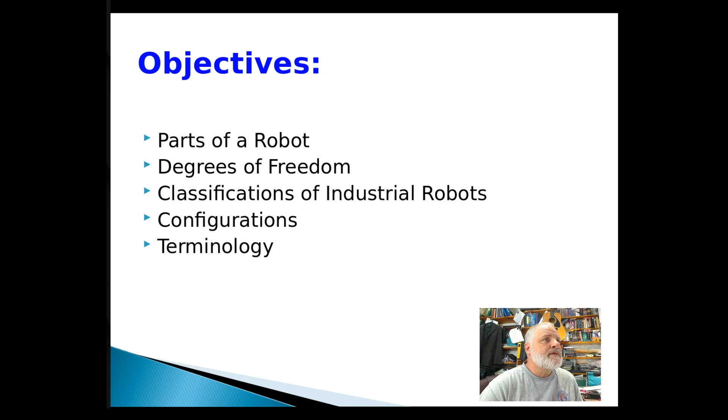So the robot system, as defined by the Robotic Industries Association, or the RIA, which we discussed last week, but the RIA breaks the robotic system down into two parts, which number one is the robot itself with three major components of the manipulator, the controller, and the power source.

And the second part they just kind of classify as the work cell, which could be like the microcomputer, PLC devices, HMIs, signal interfaces, all the other peripheral equipment that is needed to make a functioning work cell. FANUC, on the other hand, they add the software as a major component.

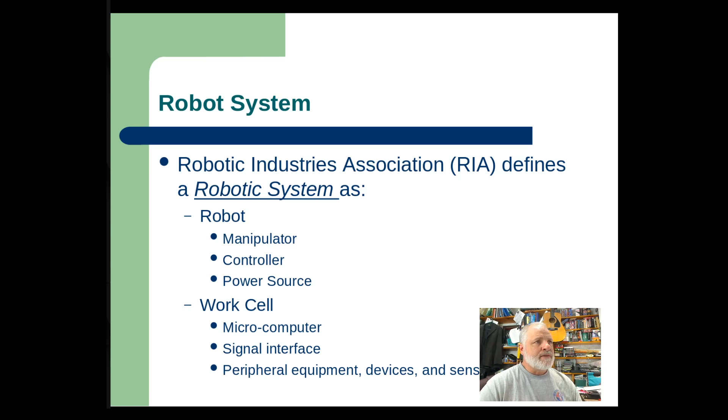Okay, so if we look back, we see that the RIA basically defines the manipulator or the robotic arm, and then the controller, and the software actually runs or is found within the controller, and then the power source. So FANUC, they don't really separate the power source, but they have the mechanical unit or the manipulator arm, and then the software, and then the controller, and then all the other peripheral equipment.

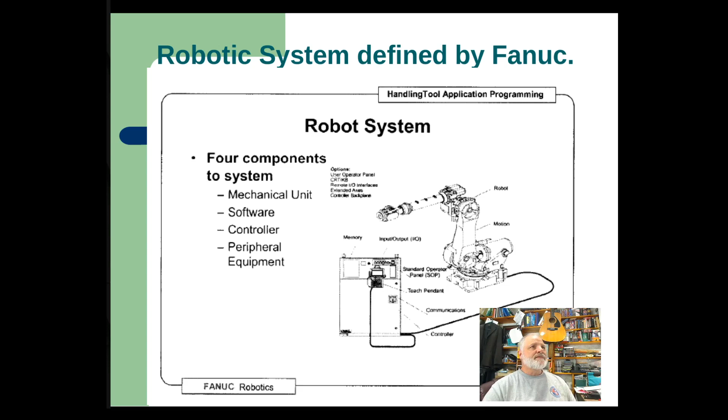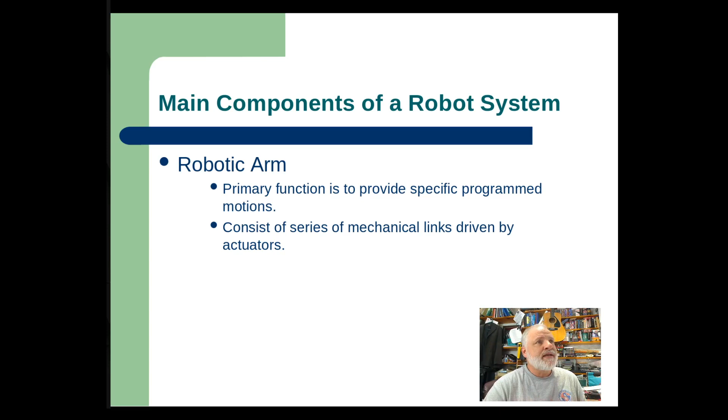Alright, so looking at the robotic arm, this is the part that when people think of robots, this is what we think of, the part that's actually moving. The robotic arm's primary function is to perform specific programmed motions, and it actually consists of many mechanical links driven by actuators. And actuators, we'll look at that in a little bit, is basically saying we're going to take electrical or pressure energy and convert that into motion.

Alright, so the minor components then of the robotic arm are the actuators, which we'll look at in a little bit, and the production tooling. So the production tooling is the part that we're going to add on at the tip of the arm to perform some task.

Now the tip of the arm that we're going to attach the production tooling to, which could be a gripper or a welding tip, something like that, it's mounted to the moving tip of the robot, which is a flat surface they refer to as the faceplate, sometimes the tool plate, but usually they refer to it as the faceplate.

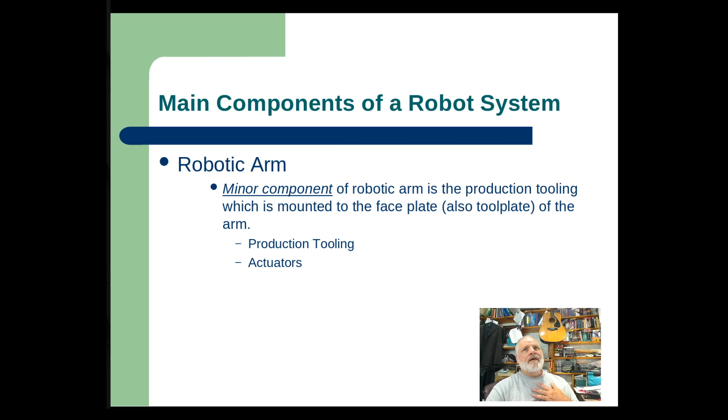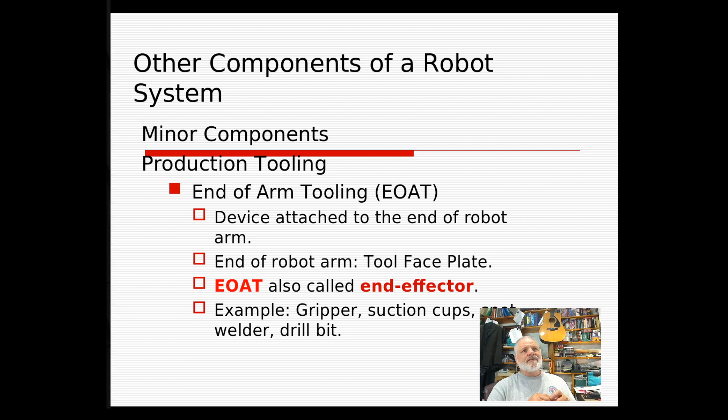Alright, and so at the faceplate there, we're going to mount the end of arm tooling. Okay, so EOT is an acronym for end of arm tooling. Again, this is like the gripper or spot welder or drill bit or whatever it is that we're going to attach to the robot. It's also known as the end effector or production tooling.

Alright, so here's just a picture kind of showing all the different minor components of the robotic arm. So we have the end of arm tooling, we have linkage, we have servo motors, which are going to make the linkage move, and then we have the optical encoders, which are typically mounted onto the servo motor, which tell us what is the position of that servo motor, and therefore what is the position of the faceplate or the end of arm tooling.

Okay, the slides are running slow here for some reason.

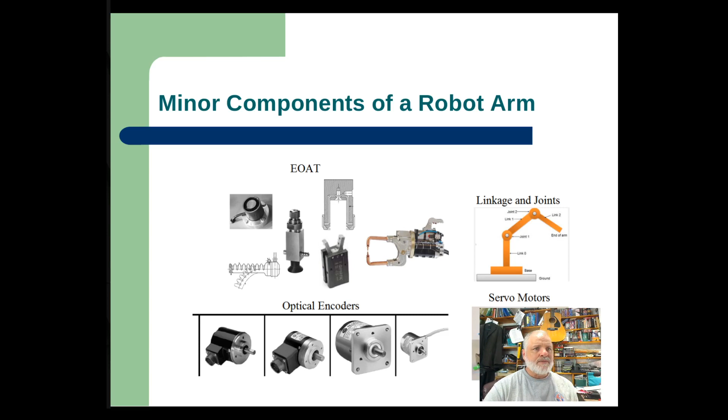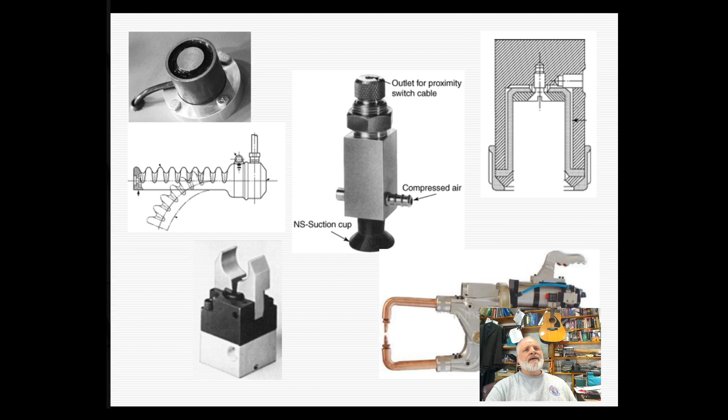All right, so here's just a blown up picture of some of the end of arm tooling. We have in the top left corner a magnetic gripper, and then below that is like a flexible finger gripper. In the middle is a vacuum gripper, and down in the bottom right is a welding tip.

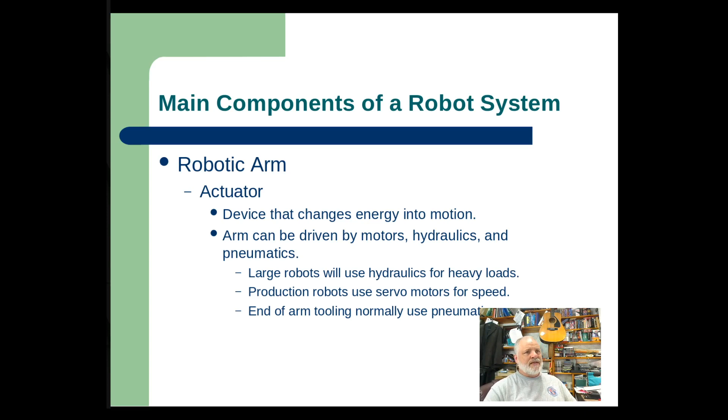Okay. So again, the robotic arm is moved by actuators. An actuator is just a term referring to some type of device that's going to change energy into motion. So usually electrical motors, could be hydraulic pressure in there. Now the robotic arm, depending on exactly what kind of robotic arm it is, a lot of modern robots have 6 different axes.

So these axes are the part that's going to move, and we break those up into different parts. The first 3 axes are group 1, which is the position group, which is moving the end of arm tooling into the area where we need it. And then the second is the orientation. So once we kind of get the tooling where we want it, we also have to kind of rotate it or point it up or down. And so that is done by the last 3 axes, 4, 5, and 6.

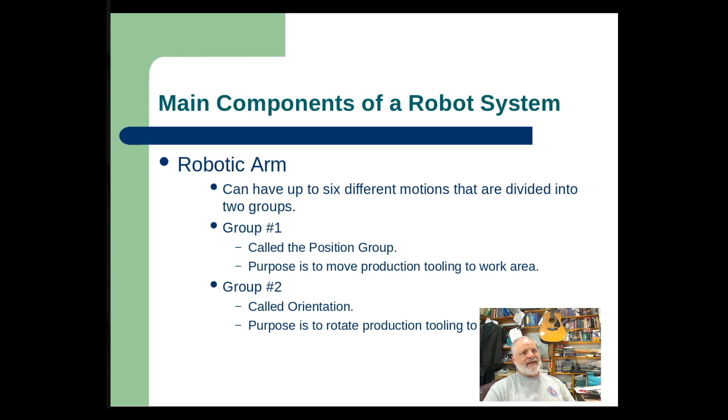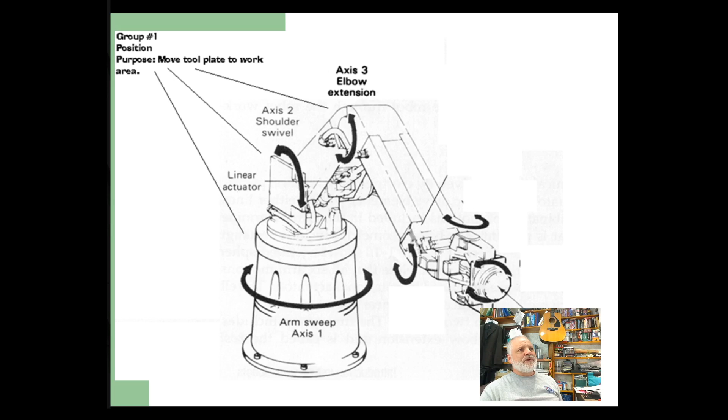And so group 1 includes axis 1, 2, and 3, which if you think about it as a human, axis 1 is kind of a waist movement, twisting. Axis 2 is kind of like your shoulder. Axis 3 is kind of like your elbow. And then axes 4, 5, and 6 deal with kind of your wrist movement. And they give you the yaw, pitch, and the roll. So they allow you to point it up and down, angle it sort of left and right as a yaw, and also to rotate it.

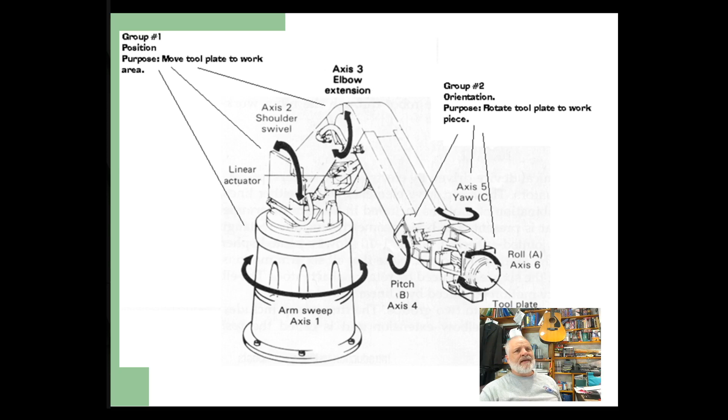All right. The controller is what's sometimes thought of as the brains of the robot. That's actually where the CPU is. And so in some ways the controller is just kind of like a PC or a laptop or even a cell phone. It's got a CPU, it's got memory, and it can communicate with other robots or other equipment.

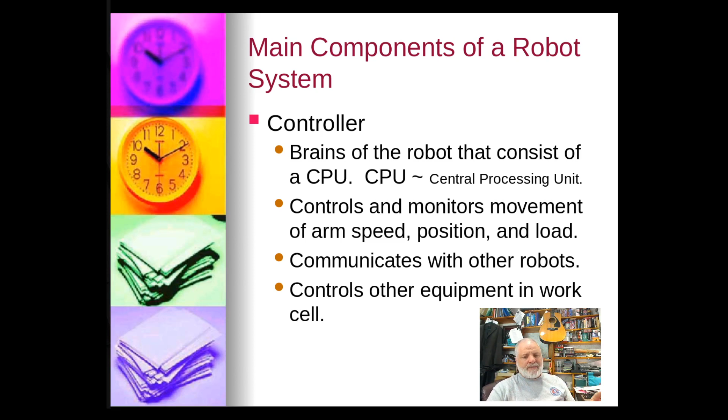All right. The controller then is going to be running software. So we have the application software. When you purchase the robot, you're going to get this application software. In a PC, you would probably think of it as Microsoft Windows, the base operating system of the computer. But in industrial robots, it's usually a proprietary type of software that, depending on whether you get a FANUC or an ABB robot or whatever, is going to perform the same tasks but in slightly different manners.

And then the controller, of course, is also going to have the programs that are created by the operators, or at least the programmers who set up the work cell to complete the task. The controller also has memory, just like any other PC. It has dynamic short-term memory, which programs are loaded into to be executed. The dynamic memory is also used for temporary calculations or to store inputs from sensors so that they can be used by the program.

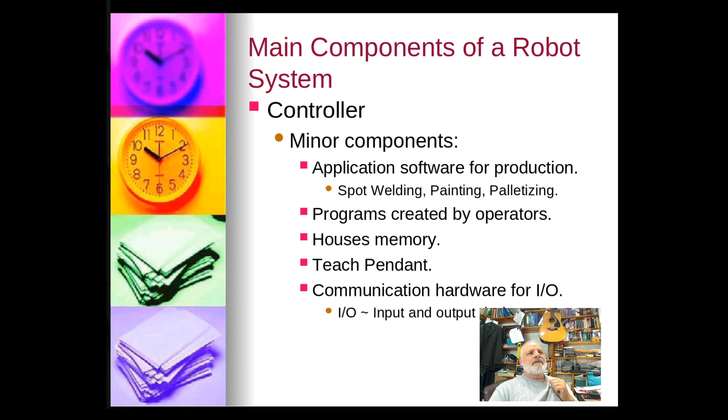All right, so the I/O interface allows us to connect up sensors and actuators to the robot. So in a lot of ways, the controller is really like a PLC. If you're aware of PLCs, programmable logic controllers, it's a PC that has lots and lots of inputs and outputs to it. And so with the robots, you have the ability to wire up, literally on the large robots, hundreds of different inputs and outputs.

Okay, so then the teach pendant is sometimes referred to as a human machine interface, or HMI. But the teach pendant here is what allows us

Slides aren't keeping up with me here.

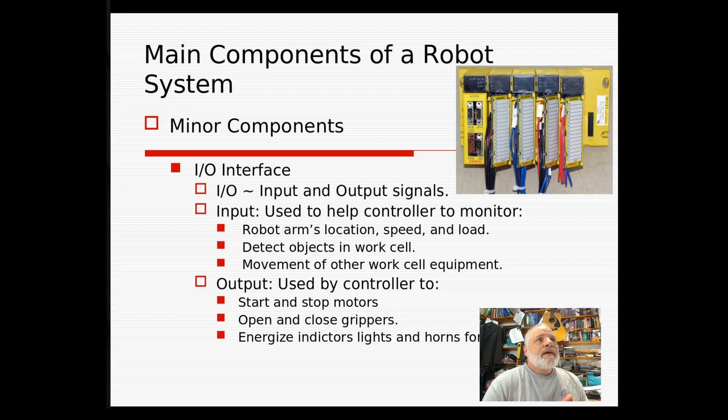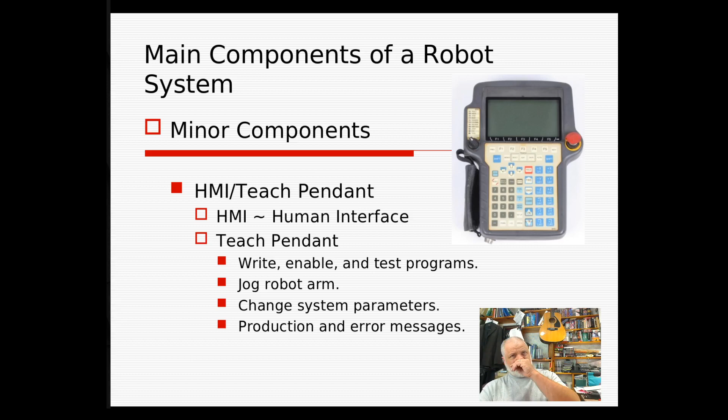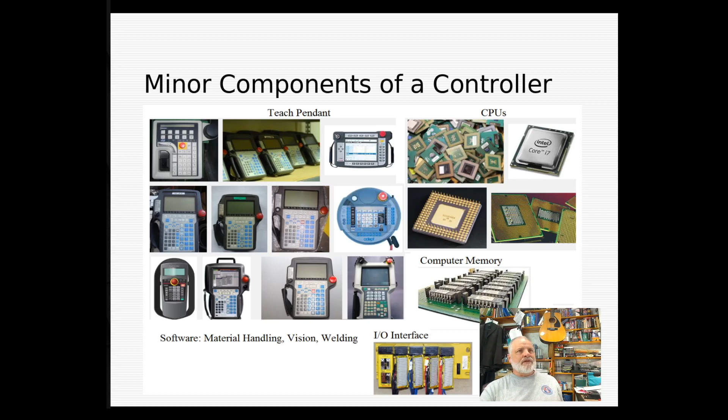So the teach pendant gives us the HMI, and allows us to program the robot and, as I said before, to jog the robot. Jogging simply means we're going to move the arm to a certain position for maintenance or teaching purposes. Okay. So here's just a slide showing some pictures of some different minor components of the controller: the teach pendant, the CPU or processor, memory, and the I/O interface.

Okay, for power sources, and we'll discuss these all in detail later in the semester, you basically have three different types. You have electrical, which would be AC or DC motors. These are excellent. They give good speed and very accurate positioning. Hydraulic could be another power source. The advantage of hydraulic is that you can lift very, very heavy loads. And finally, there's pneumatic power sources, which are used quite often to activate vacuum grippers or finger grippers.

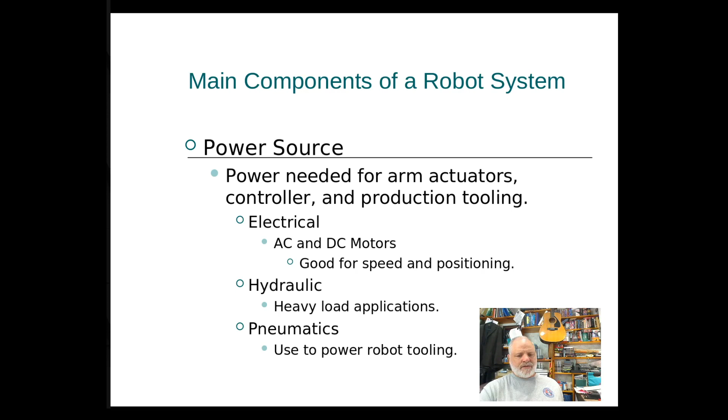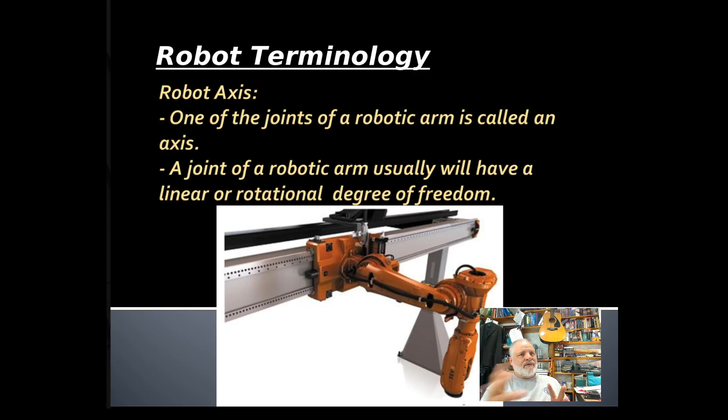All right, so when we talk about the axes of the robot, these can be either rotational or linear. The robots we've looked at before all had rotational axes, but this particular robot actually has the first axis, the one that's mounted to a fixed position, as linear. It just moves back and forth in a linear fashion, and then the rest of the axes are rotational. Whether your axis of movement is linear or rotational will kind of specify your work envelope. We'll see that in a little bit.

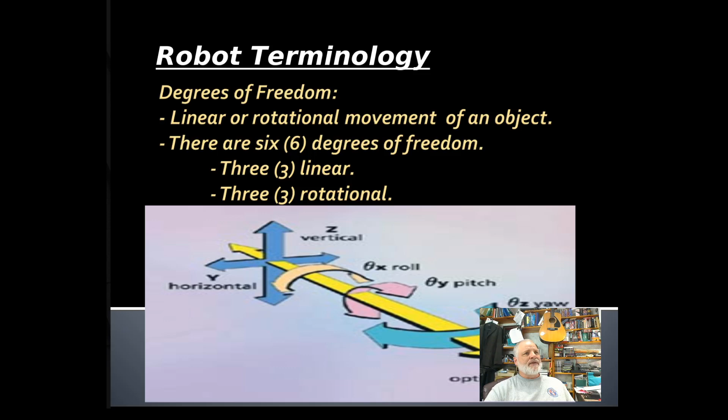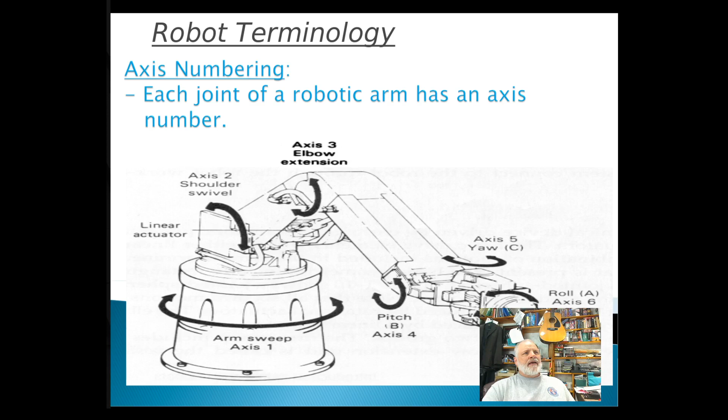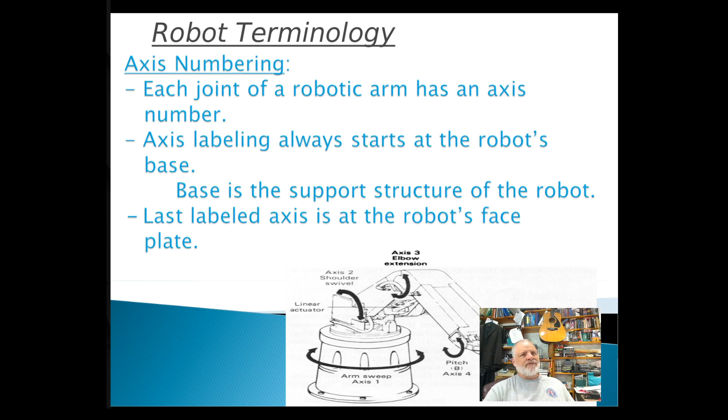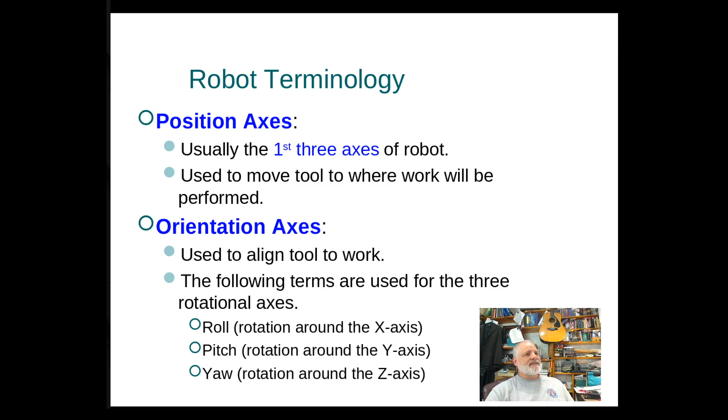So, this is an articulated robot. All 6 axes are rotational. When you count the axes, you start counting from the base where it's mounted, and then you count up each axis in numerical order: 1, 2, 3, 4, 5, 6. The first 3, as we talked about before, are group 1, which gives us our position and gets the tool to where we want it in space, and the last 3 are our orientation. When you look at yaw, pitch, and roll, we're trying to duplicate human body motion. So axes 4, 5, and 6 deal with the pitch, the yaw, and the roll.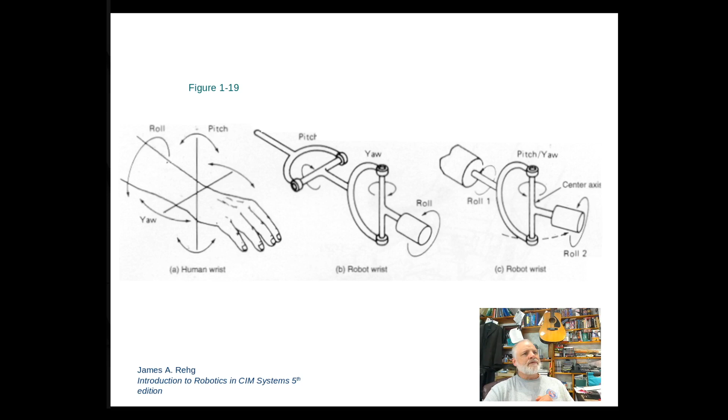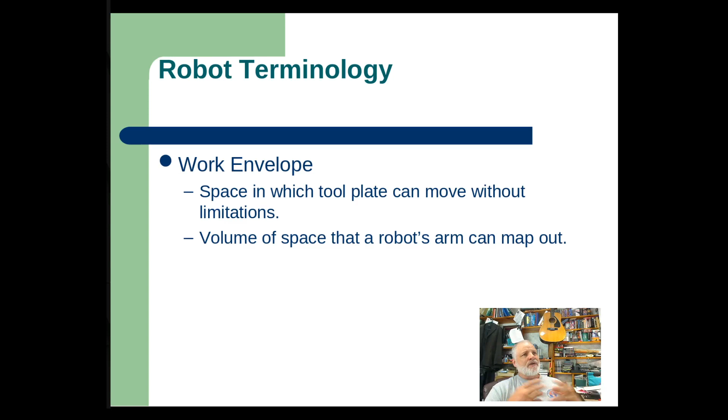Now the work envelope is the space in which we can get that tool plate to move. So once we attach a tool, then the work envelope of the entire robot with the end of arm tooling will actually be expanded some. But if you think about the tool face plate, which is mounted at the tip of the robot before we mount the tool onto it, the work envelope basically specifies where we can move and the geometry of the robot. And we'll look at that more next week.

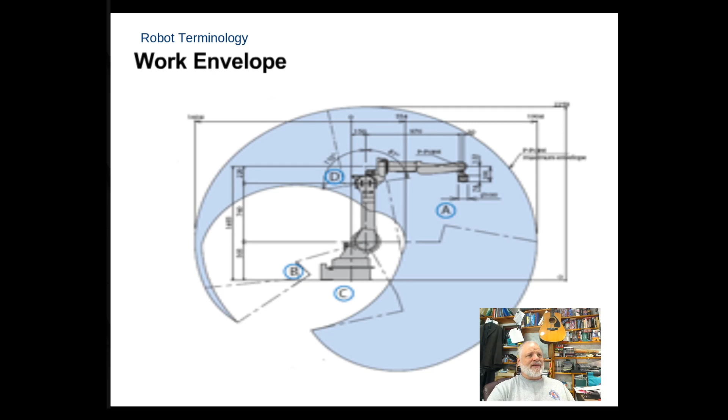The work cell is the area where we're going to put the robot and complete the task. Typically, the work cell is going to be closed off for safety to prevent people from moving into the area where the robot may reach.

Another term here is the tool center point. The tool center point is that point in space that we need. That's kind of like your working point in space. So you have the faceplate, which is the tip of the robot, is going to be several inches in size, but the tool center point is going to be dead center of that faceplate. However, this is with no end of arm tooling attached.

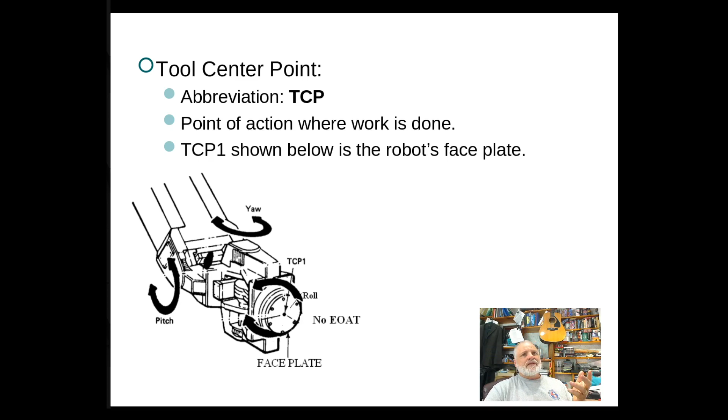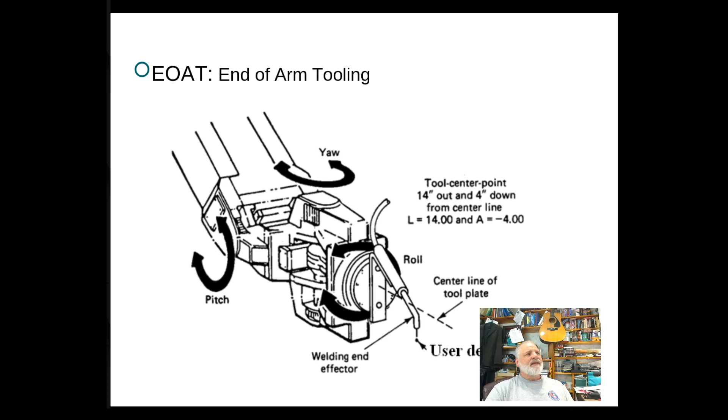And then when we attach the tooling, we need to teach it where that tool center point is at. So we're going to have to define it based on the type of tooling that we're going to attach to the robot. So here in this example, we have a welding tip here. And this welding tip obviously is not the center of the faceplate. So we actually have to define that tooling.

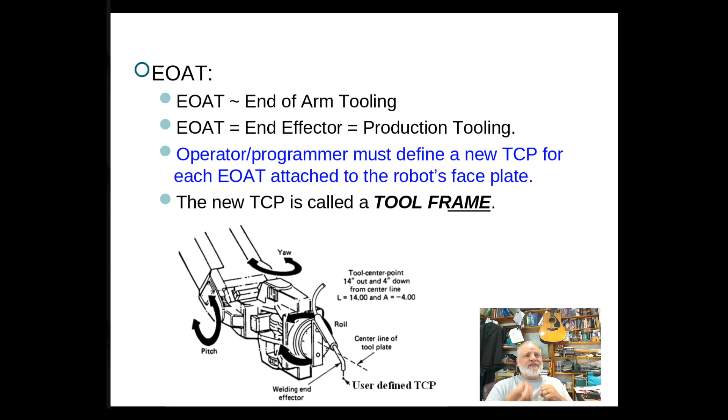So you see the user defined tool center point here. This is done by what we call a tool frame. So the tool frame gives us a frame of reference where the center of that reference is the tool center point. Now when you have various different types of tooling, you may actually need multiple tool frames.

Another thing to be concerned about is the payload. The payload refers to the maximum amount of weight that the robot can lift at the tool center point. So depending on the type of tool center point, that's going to affect it, but also the type of end of arm tooling or production tooling that we have mounted.

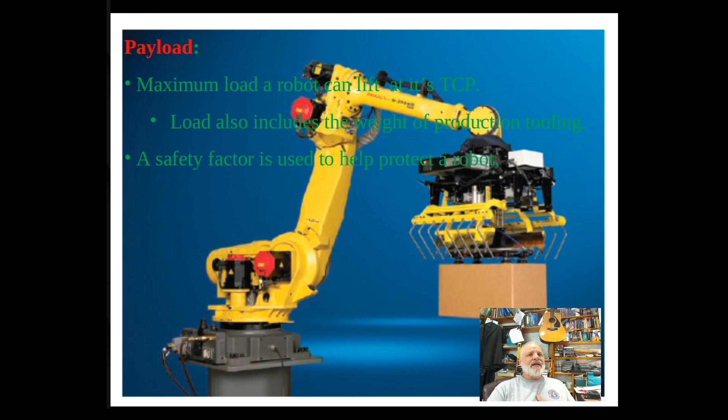So this gripper in this slide is picking up a box. We have no idea what's inside the box, but the gripper itself, just looking at it, looks extremely heavy. And so you have to take into account how heavy your gripper or your end of arm tooling is. And then you also need to build in a safety factor. So you don't want to be operating the robot at its maximum load all the time.

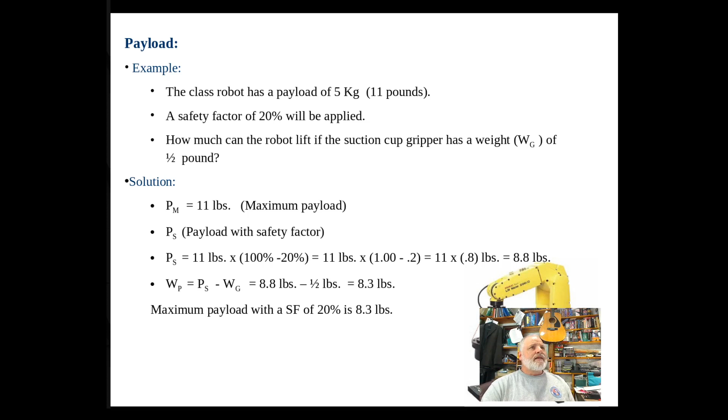So this is a robot here down in the corner, kind of not showing real well, I guess, because of the webcam there, but this is a 200iC LR Mate robot, which we have two of in the classroom, and they're rated with a payload of 5 kilograms. That is essentially about 11 pounds. They're not a large robot, so they can't lift a whole lot.

So remember, though, this 11 pounds or 5 kilograms is at the tool center point. And then we want to always build in a safety factor. Just a rule of thumb would be 20% below the max payload that the robot's rated at. So if the robot can lift 11 pounds, but we build in a safety factor of 20% or 0.2, then that means that we can lift about 8.8 pounds with this robot safely in a repetitive manner.

And in the example problem up here, they're telling us that the gripper itself weighs about half a pound. So that means that the objects we're going to be picking up could weigh no more than, say, 8.3 pounds.

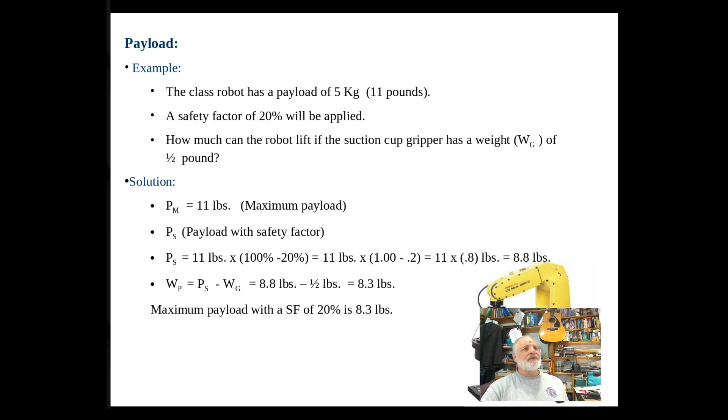All right, some other terms we want to consider here are precision. Precision refers to the numerical value of some value there, and it's looking at how many decimal points we're going to take that out to. So the more decimal points you take that out, the more precise you can be. Precision is talking about how many decimal points.

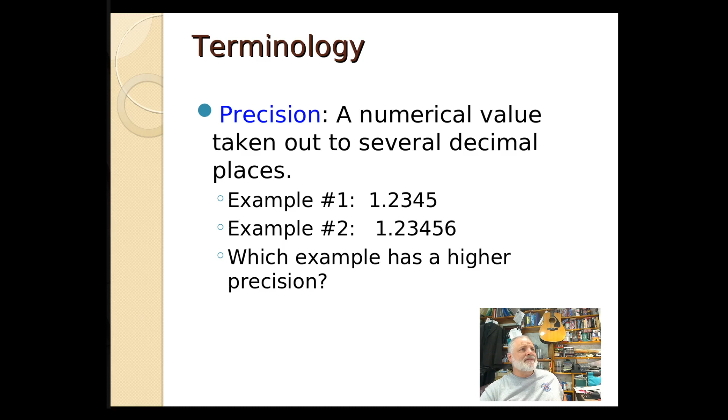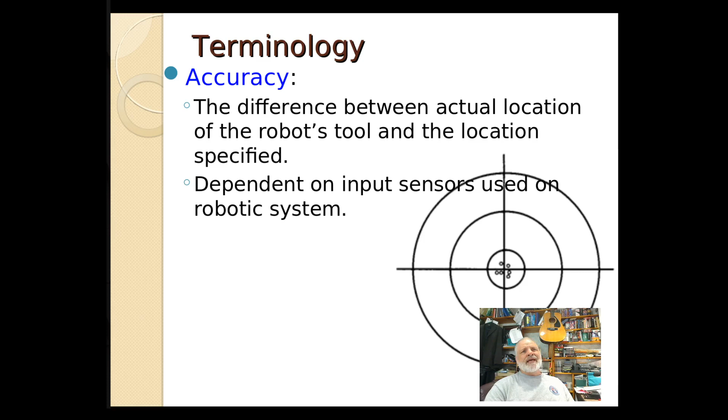And then we have accuracy. Let's say that we wanted to move our tool center point here to the center of these crosshairs, and the little circles that you see there are where it actually ended up on multiple returns. So we're telling it to go to a point in space, and we're looking at how accurate we are to that.

And then there's another term, repeatability, which says, well, maybe we're not real accurate. So on this slide, we're not actually reaching that tool center point, but we're getting this point here in the top left quadrant. When we go there multiple times, we're always fairly close to where we were the previous time.

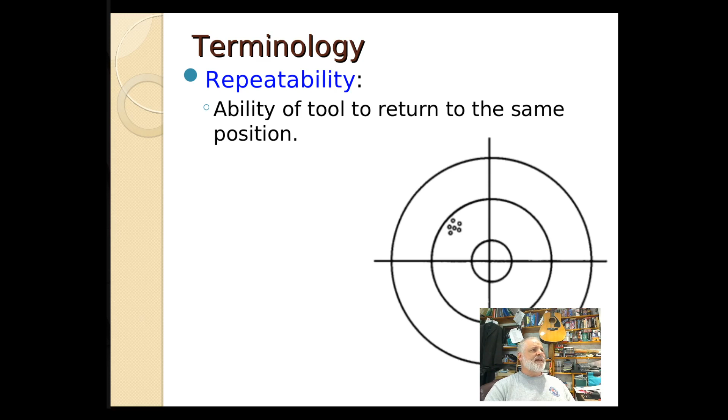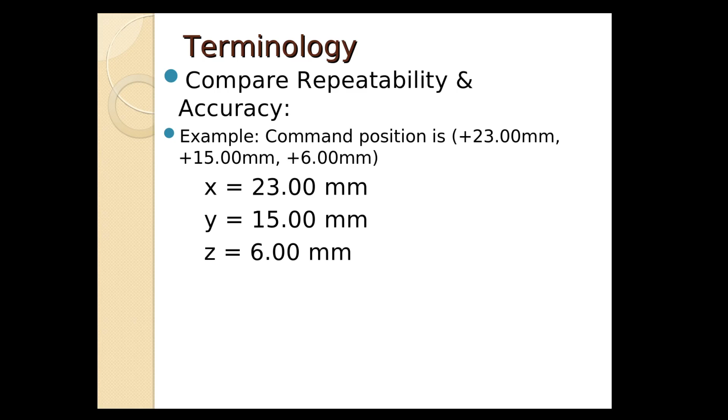If we look at an example here, we created a program and we wanted it to go in the X direction 23.00 millimeters, the Y direction 15 millimeters, and the Z direction 6 millimeters. So we run this program, and the first time it went to 23.05, 15.1, and 5.58.

So we can then look at the accuracy of this movement. It was supposed to be at 23, 15, and 6 exactly. We see that it was off 0.05 millimeters in the X, 0.1 in the Y, and 0.42 in the Z. So what we want to do is look at the largest one here, and we're about 0.42, less than half a millimeter off from where we really wanted it to be.

All right, but now we're going to run this program again and send it back to that same point, and we see that the accuracy in this case was a little bit better in the X and the Z, but actually worse in the Y.

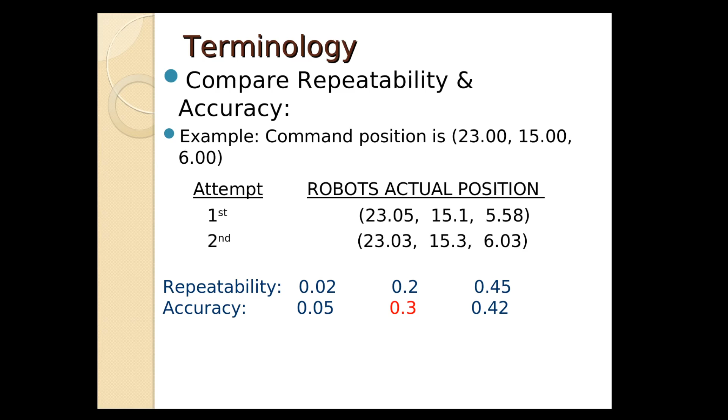But now that we've got two runs of the program, we can also talk about the repeatability. We can see the repeatability in the X, Y, and Z directions, and see the difference between those. We see that the repeatability was actually 0.45 off in the Z direction here.

And then if we run it a third time, we can look and see that the accuracy in the Y direction actually got worse, that's why it's shown in red. But as we run this program multiple times, we can look and see what our maximum accuracy was from where it should have been, which was that original 23, 15, and 6 millimeters even. And then we can also see what our repeatability of that robot is.

Okay, so again, repeatability is how accurate we are within multiple times. Accuracy is how far we are from the actual position we wanted to be, and precision is how many decimal points we take it out to.

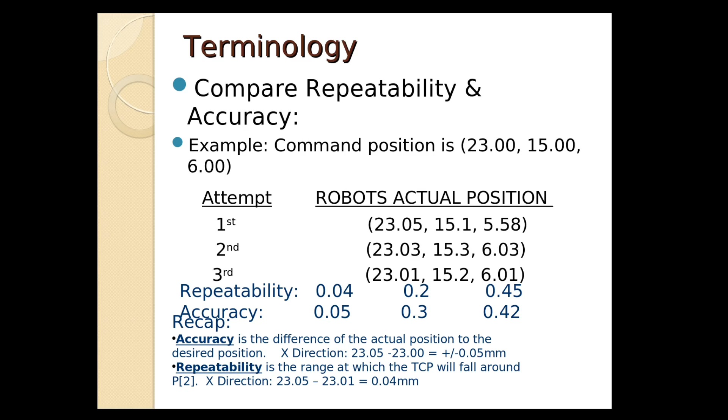All right, another term is the resolution. When we're talking about measuring, the resolution is the smallest distinguishable increment that we can actually measure. So like on the previous slide where we're talking about five hundredths of a millimeter or 0.05 millimeters, those are very, very small - it's very hard for the human eye to detect.

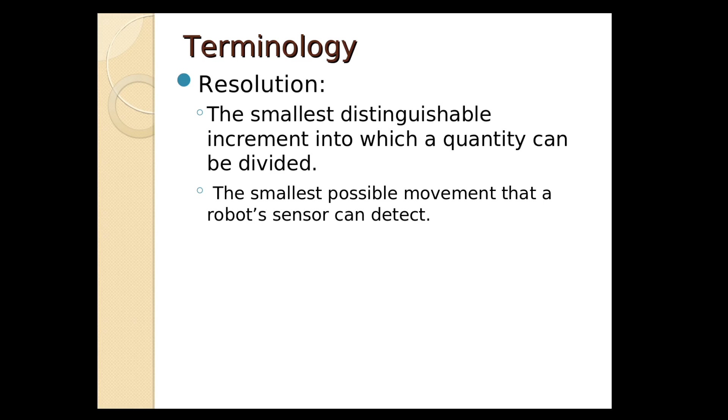Another place we talk about resolution is with the optical encoders on the servo motors. The servo motors are rotating around, and they have these encoders on them to detect how much they've rotated. Some of these encoders are just really amazing, and they can detect up to 40,000 pulses for one complete revolution of 360 degrees. So the resolution then is almost 111 pulses per degree, or if we look at it in reverse, we can say 0.009 degrees per pulse.

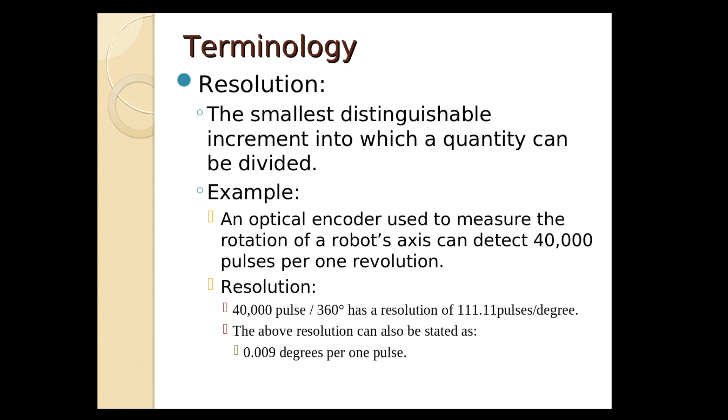So that means that if you give this servo motor a pulse to move 0.009 degrees, you can detect that it has moved. This, to me, is very impressive, because with the visual eye, you cannot see that it moved 0.009 degrees. But on the other hand, these encoders can actually detect that. So that's the resolution.

All right, there we go. So we talked about the parts of the robot, the degrees of freedom. We just briefly discussed the classifications - we'll get into that more next week - and the configurations, and we discussed quite a bit of terminology. So that's it for...